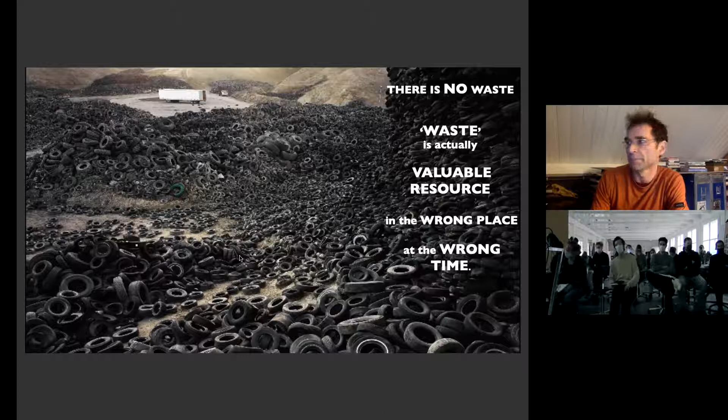Well, that's what I just referred to - there is no such thing as waste. Waste is actually resources that are for some reason not being used because they're in the wrong location or available at the wrong time, and then they get disposed of, which is a very unnatural way of dealing with materials. The construction industry is a very big part of that - we cause about 30% of all waste and 30% of all CO2 emissions, so there's a lot to win there. We say it's 40% - yeah, it might be even more, I know.

And this I find also an interesting thing, like we're constantly building and rebuilding our cities and the buildings. Quite often concrete buildings are torn down to replace them with sustainable buildings. And I don't really understand how you can think that that's sustainable.

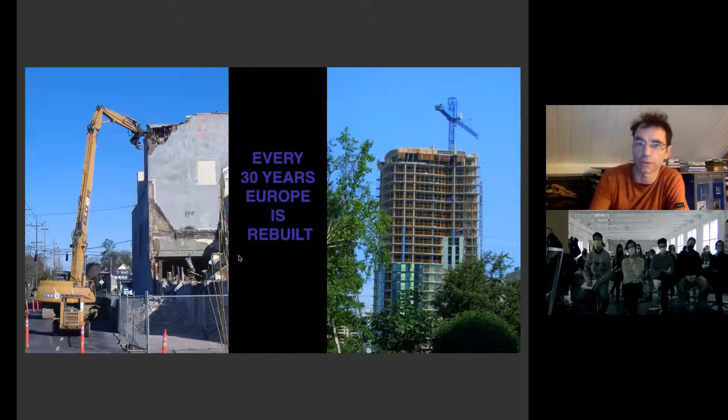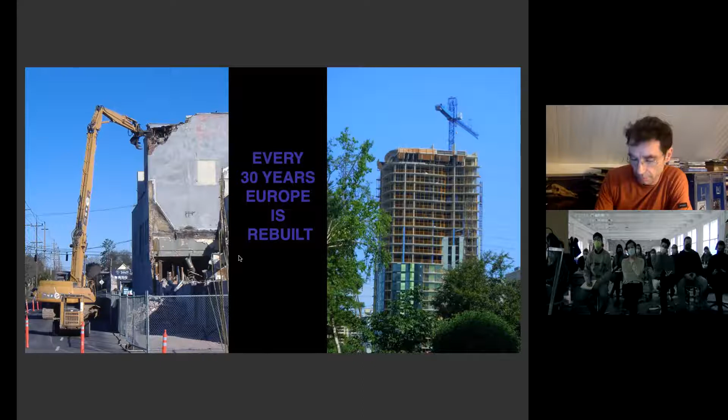I understood that the structure you're in was a temporary structure and will soon be demolished, which gave it quite a long lifetime, but I still don't really... I had a walk through it with Kevin this afternoon on his iPhone, and I think it's a very valuable district of the Zurich school. So it's a bit of a shame to tear it down. I think it needs structures like that in a school.

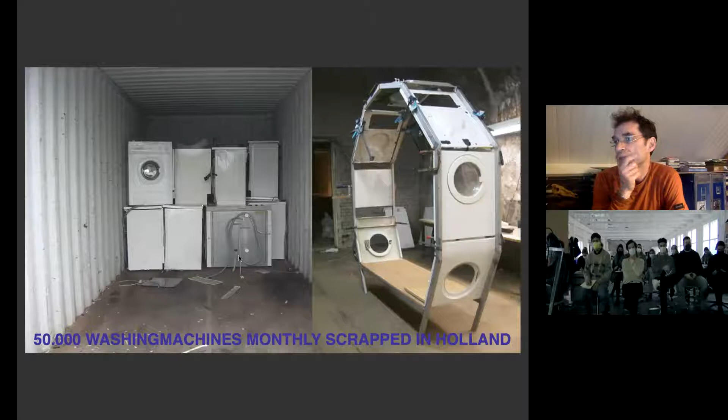Well, this is where we started. After we were studying, we came to the observation that a lot of waste was being recycled also. And we found one company in Rotterdam that was actually recycling 50,000 washing machines every month. And that's only the washing machines from Dutch households. And that seems so incredibly much, but that is actually true.

If you calculate the lifetime of a washing machine and the amount of people in Holland, then that is really what happens. And then it's a lot of energy to bring a quite interesting material down to basic resources again. So we thought we have to do something with that.

And we made this quite iconic object with it, which for us was not a piece of art, but for us was really a prototype for architecture. And we were also quite happy - well, not happy that it ended, but quite happy - that the University of Delft decided to buy it from us after it had been traveling Europe for 5 years. And it became an espresso bar.

Unfortunately, the whole building burned down one year after due to fire in a coffee machine - not ours, luckily.

But also in Dresden, there's a company in Germany that is scrapping airplanes. And from that we got - obviously the aluminium gets recycled and has quite a high value - but all the plastics that are in it are basically an environmental hazard and a problem if you want to recycle them, because they are very difficult to recycle.

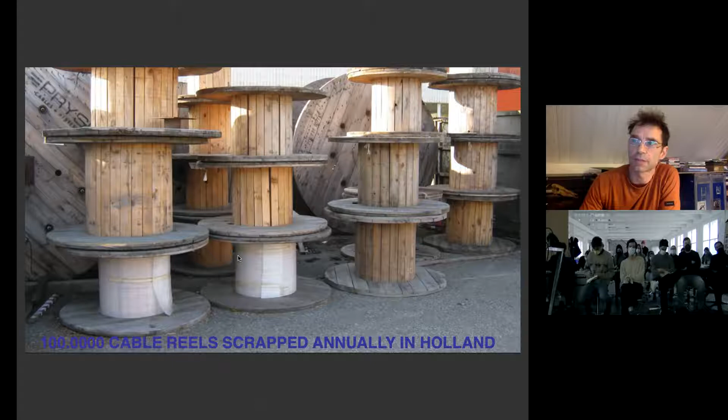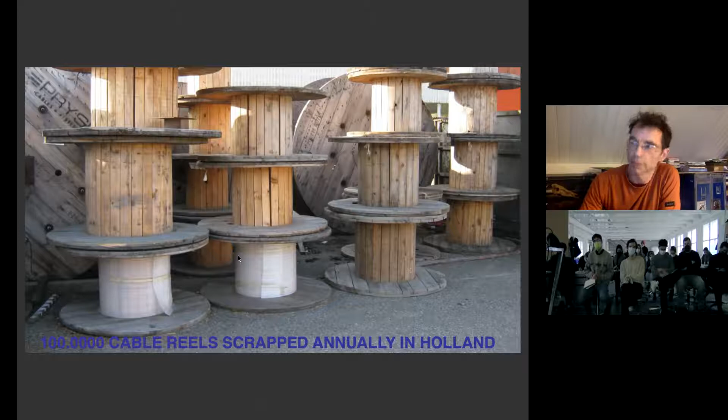But anyway, the cable reels - that's another resource that we've been using a lot. And I realized we have been using a lot of materials that are not part of the normal architectural language. The reason why we've been doing that, especially in the beginning of our practice, is that those materials are wasted in big quantities and are usually standardized materials. So these cable reels have standardized sizes.

With that you can make - well, this is just a first exercise we did - an art piece that we made to cross the river with, where we actually used the turning capacity of the cable reels. But then later we started using it in interiors. And the fact that it's a very standardized material starts to help make a kind of logical design from it, and also the curved forms of the materials - like I have a few samples here.

You see that it has this curved section, but that's used to make the benches with rounded, ergonomically rounded forms. That's what we always look for when we design with waste materials - figure out how to optimize the use of the qualities of the material. I've seen a few of the mock-ups, for instance the one with the stones that you've made. I think you really managed to discover the typical properties of those stones to create both aesthetics and really functional use of it.

I think that's really important in our work, that we always look for a way to functionally reuse the waste. Another thing, can you see my cursor? What you see here, for instance, this is a piece of metal that makes the table, which is also part of the cable reel. And these are the metal rods that keep the cable reel together. And even these things that are the feet of the tables are the rings that keep those metal rods in the cable reel. So we try to optimize using all the elements in a functional way.

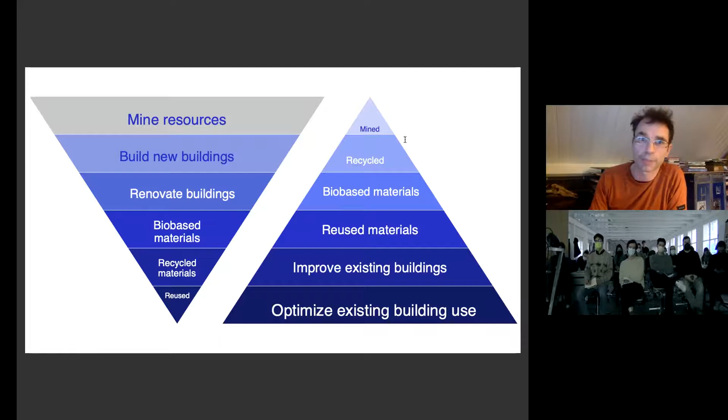And then if you looked at all those things, you add a layer of bio-based materials, recycled materials, and then you end up using much less mined materials. I don't say we have to stop completely with the mining, but if we can reduce it to like 10% of what we're doing now by taking all these other steps first, then we can have quite a big impact on the rest of the world in a positive sense - we can stop having war about resources because it's not needed anymore, because the cities start recycling, are in a circular system.

locate WORM in there. WORM is a multicultural organization that has offices, shops, a concert room, and a movie room. The concert room, movie room, and all the bars and so on is what we call the red WORM. The yellow one was all the shops, and the green one the offices and the facilities.

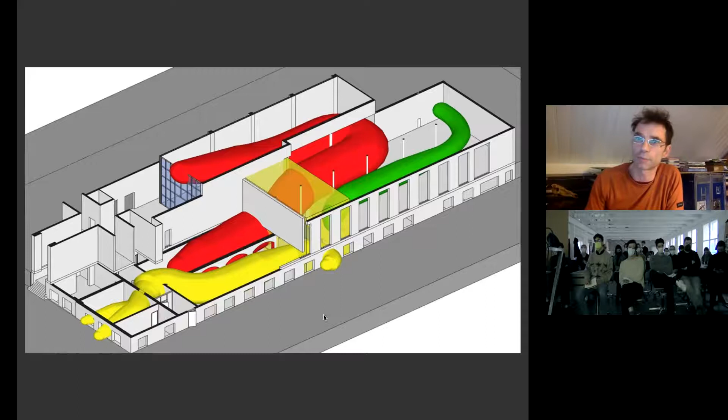We found out that if we want to locate them properly in the building, we had to make one strategic change in the structure, and then we could organize all those functions in the spaces that were already available without demolishing anything more. So we made one small incision by putting a gap in the facade, pushing the facade forward and creating an entrance and a staircase behind that entrance that connects the basement layer with the first layer, and that connects the offices, the concert room, and the shops.

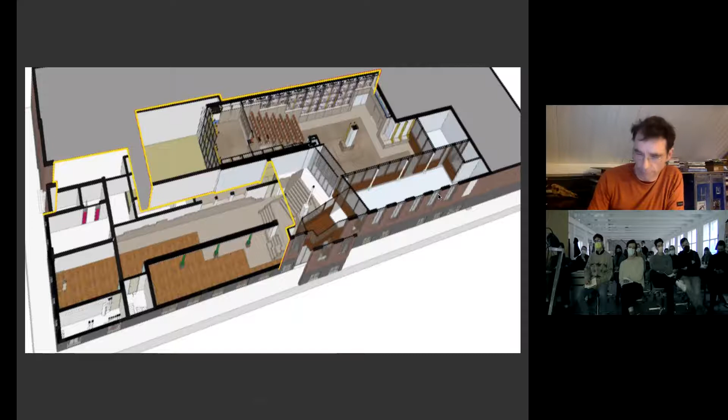By doing that, we could reuse all the spaces that were in there and change as little as possible. That was step one: transforming the existing building in a very precise way. It even went that far that there were dark rooms in the building from the former functionality, and since WORM has film studios, they could use those dark rooms literally exactly how they were. There were toilets and showers that we didn't have to build again.

Just by making that good investigation of the existing building and understanding where we would have to change something to optimize the use. The next layer is adding materials, and then not using any new materials. So we make a harvest map. The harvest map is two things for us. It's a tool that we use when we start a project to understand what kind of waste will be available when we build the project, so we can design with the waste that is actually available in Rotterdam, to build a project in Rotterdam. We don't have to transport waste, because we try to reduce the transport energy too.

And the other harvest map we have is an online platform where we've collected all the information about waste that is available in Holland. We've actually privatized that - it's now run by a different company. We are not running a harvest map anymore, and that's good, because they are spending their time on it. We still add things that we discover.

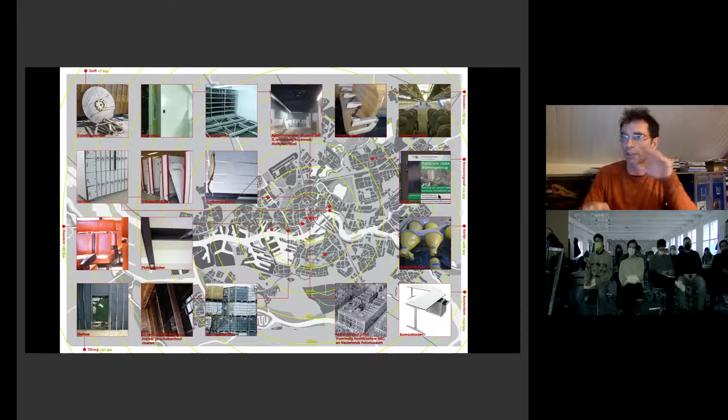By having this way of thinking and this tool, it also makes you design differently. You have to design from the materials that are available, and you don't first design something and then look if you can find the materials - you first look at what materials are available. You understand a bit the structure of the project: how much seating do you need, how much flooring do you need, how much insulation material. Based on that, roughly, you start looking for materials that can perform that.

So we knew that we needed about 2,000 square meters of very solid flooring for people to dance on, and thousands of people to walk on every weekend - hundreds of people, but over the years, thousands and thousands of people. So it has to be really hard and solid material. And flooring is quite expensive, so you also have a budget.

We found a company that was selling office furniture, and they had what you call dead stock - material that is actually new, but difficult to sell for several reasons. In this case, the reason was fashion. This office furniture was in a color gray that was popular in the 80s, and he somehow had 2,500 of these office desks in stock that he could never sell again. Other colors he could sell, but the gray one was impossible to sell because nobody wants it anymore.

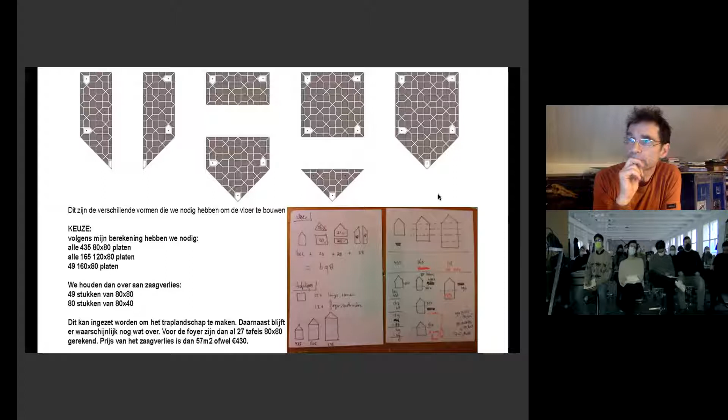So our challenge was to develop a pattern to lay these desks in. And the other interesting thing was that, of course, it is Trespa.

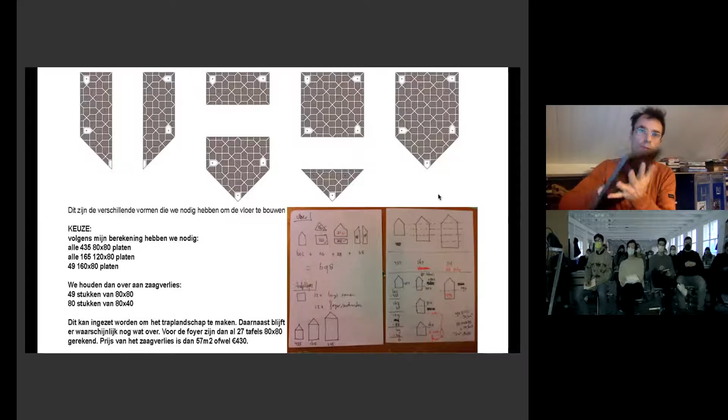I have a piece here. And it's completely this light gray color. It's a 9 millimeter thickness. It's a high pressure laminate, so it's a very hard pressed wood actually. And the top layer is also quite hard.

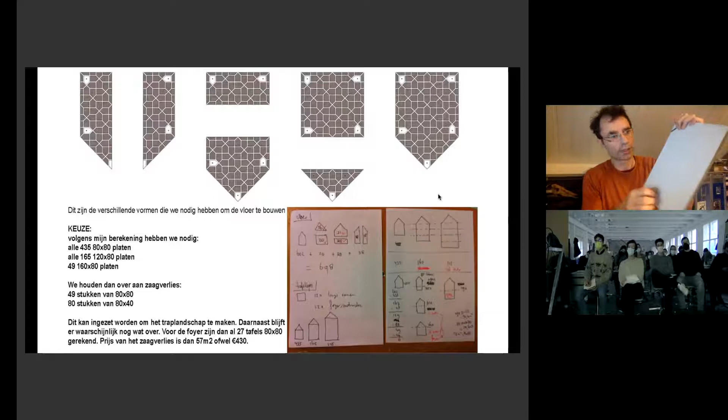But we found out it's very slippery, so if you spill some beer on it and start dancing, people will fall. So it's not good for a floor. The only good thing for the floor is that it doesn't wear. Basically, it never wears. So we decided to sandblast it. This is the gray top layer, and this is the sandblasted, very rough bit.

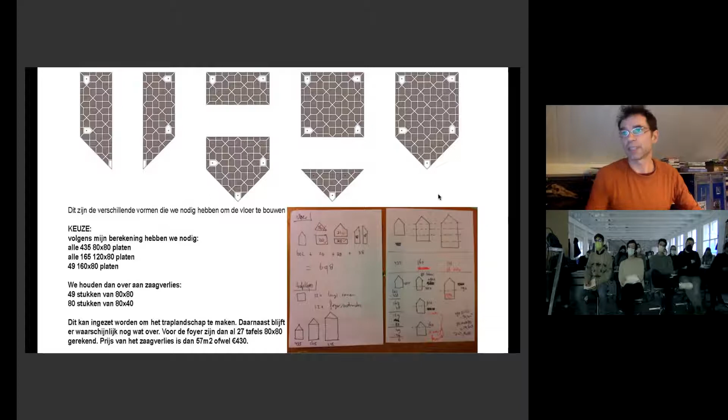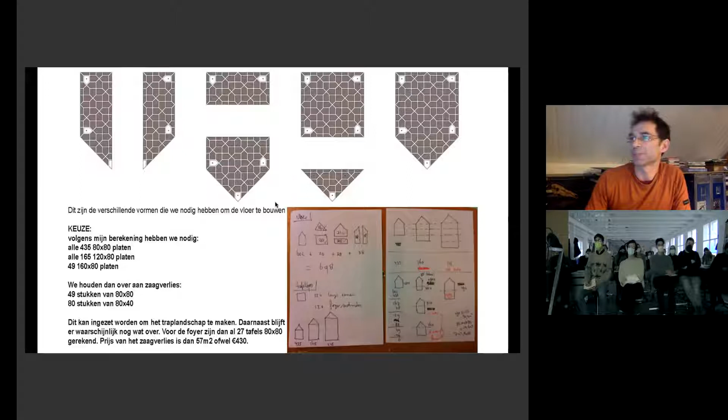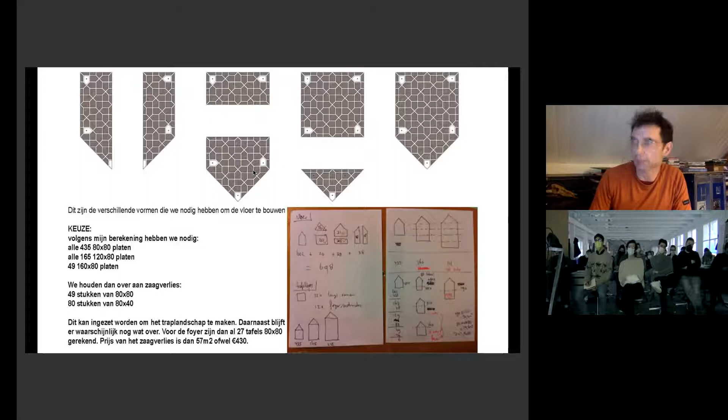The guy selling it told us, well, since you're going to use it as floor tiling, I suppose you're going to cut these difficult triangles off, so I'll give you a discount for the square meters of the triangle. And that made me think, okay, can we make a laying pattern in which the pattern that is sandblasted on it also represents the pattern in which the floor is laid? And that becomes a decorative element, even though it is designed from a functional perspective.

We got really enthusiastic about the material, so we also started using it for the plinth, the lambrisering, the first 1 meter of the wall. And in this is hidden the ventilation system.

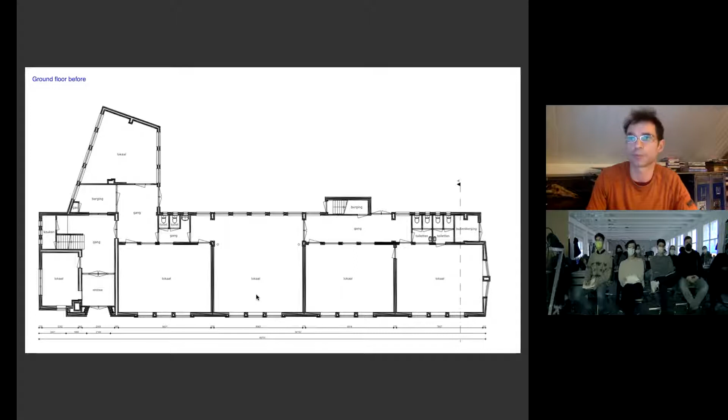So they asked, and also it was due to regulations, it was very difficult to put a public space in the building. Because of fire regulations and fire brigade requirements, we would have had to change so much about the building to integrate it, that we decided to build a pavilion outside the building on the former school square.

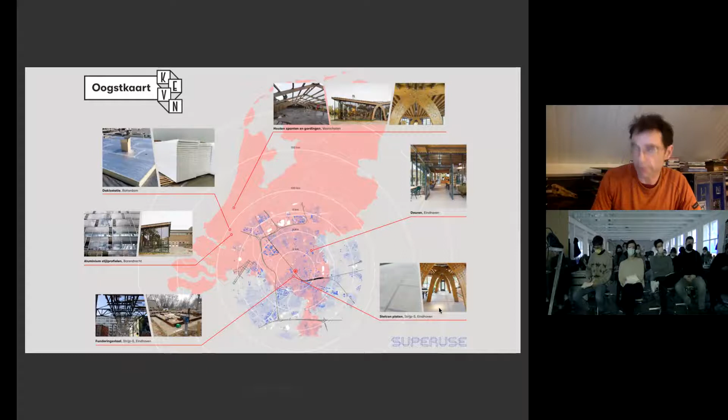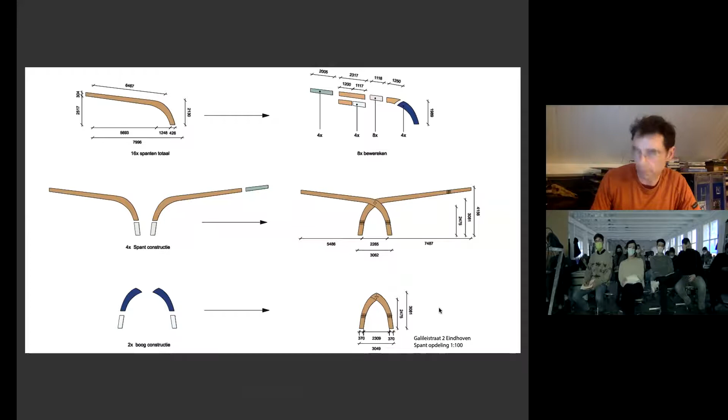That's where that was made. And then we made a harvest map, and we found that a lot of the heavy materials were actually just across the road, while the lighter materials came from other places in the Netherlands. We found these wooden structures that, by chopping a few of them into pieces, we could redesign into the main structure.

Another aspect of this building is that it's demountable. So all the bolts - we didn't glue anything. Everything was mounted and dry fabricated, so the whole pavilion can be taken apart and transported somewhere else if for some reason it's not wanted on that spot anymore.

You can see also in the floor we used concrete slabs, and you can see the lines between them. They are just stacked. The foundation is stacked. That's what you see here.

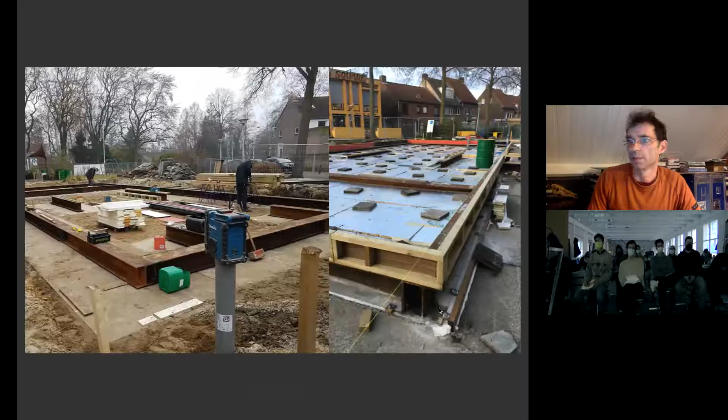So we used standard concrete elements, and the metal came from a demolition on the other side of the road, and then insulation, and stacked it all up until you got a floor, on which the main structure was then built.

Then another material that we worked a lot with is another composite material. So this is the wings from the wind industry.

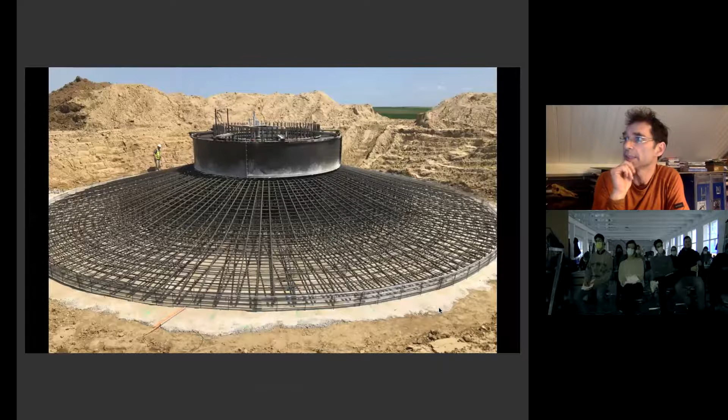What I find interesting is, we've been working with wind blades now for 15 years, and I've just been to a wind conference to understand if we can work together with them, because they have really a huge waste problem. But the more I start to know about this renewable energy form, the more I get scared, because the impact it has is incredible.

This is the foundation. You see the little men, huh? And this is a land-based windmill, so it can't even be that big. The ones they build in the sea now have 90-meter blades. If you understand that the 55-meter blade, the biggest one we've ever worked with, is 17,000 kilograms of composite material, it's impossible to recycle.

They're handmade - that's interesting too. People are making these things by hand in a mold. There's a lot of labor going in, a lot of transport, a lot of materials. Transport is really expensive and requires a lot of changes - they even have to take lampposts away on crossings they want to cross, etc.

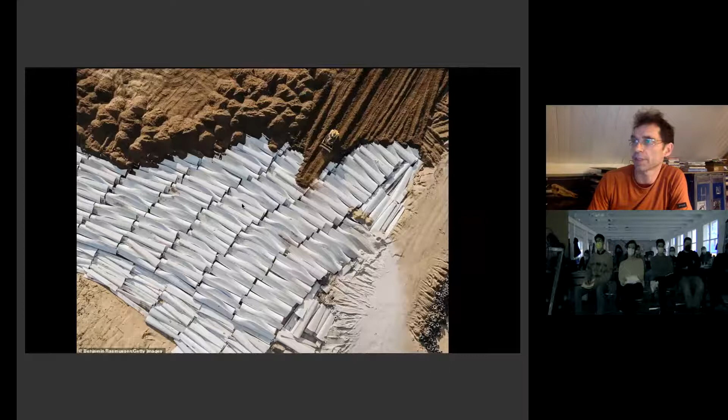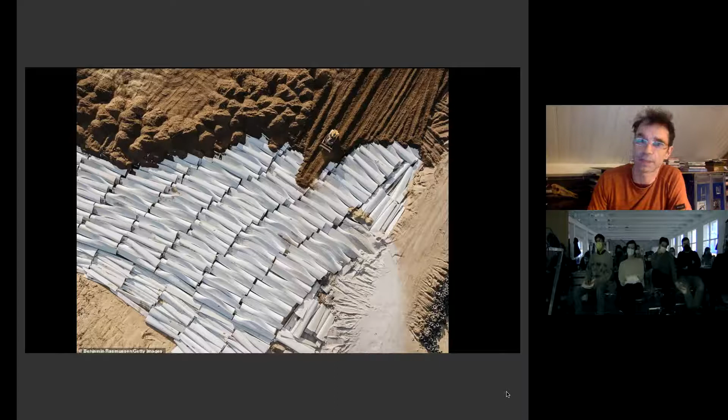And then we throw it away. That's the whole thing I don't understand. Even if I saw presentations at that wind conference showing the CO2 emissions are less than if you use fossil fuels for the same amount of kilowatt hours, I still think we cannot afford to waste resources in this kind of way. The planet is getting to an end of being able to deal with that. So I don't believe we're going to solve the climate crisis by installing megawatts of energy production at sea like this. I think we need a completely different approach, but I'll come to that later.

First, what we do with the waste. So that's still, okay, we try to extend the lifetime of the waste, and now finally the wind energy sector, after 15 years of trying to get to them, is asking us to come to conferences and show what we can do with it.

In the playground we changed more because there were also bigger blades - these are like 35 meters, 3,500 kilograms of polyurethane foam, epoxy resin and glass fiber, of which 2,000 kilos is glass fiber and 1,500 kilograms is all kinds of plastics and fossil fuel based materials.

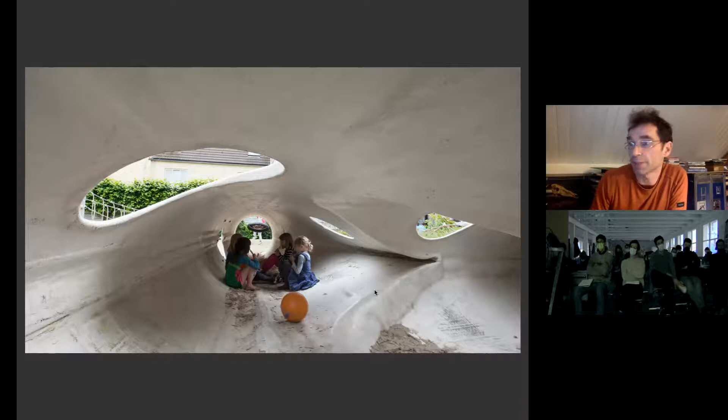And these kind of spaces - what I think is really nice about reusing this kind of waste is that it comes with so many assets. It has so many beautiful things, beautiful spaces. You could spend hours and days modeling this kind of 3D form, and we don't have to model them - they're part of the waste. And then you get a project that has much less impact, because not only do we save the waste from being wasted, we also don't need virgin resources to build a playground.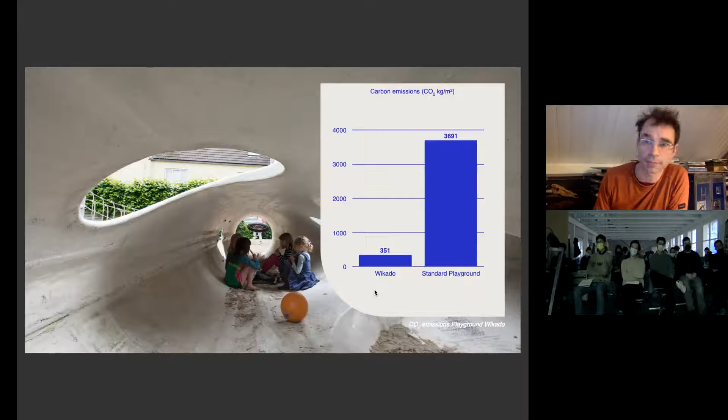So it makes quite a big difference in the impact on the planet, and it can last forever. These playgrounds - this one has been there for 15 years now and has only been painted twice in the meantime. That's the only maintenance it needs - it has to be painted.

So as I said before, we are now several studios. This is the team of the studio in Rotterdam. Jan is the other founder - together with Jan, we founded the company in 1997. This is the Chinese team. Gillian worked with us in Rotterdam for a few years and then moved back to China.

In the first two years after they started their Superuse studio, Jan traveled to China a few times, and we thought we don't want to fly too much, so we basically educated the team in China to work with the waste there, which is crazy - the amounts are staggering. They found one company that produces window frames with double glazing for the European market, and they always produce 10% extra to make sure they have enough, and that gets thrown away. That 10% is enough to start a building firm and build skyscrapers in China with it. You can't imagine how much that is.

And this is my studio - we're called Superuse on-site. I've shifted the focus a little bit towards community living and building architecture that is not only made from waste and bio-based materials, but also improves the energy performance of the building. Even though this whole workshop has been about waste reuse, I think it's a very important thing to think about.

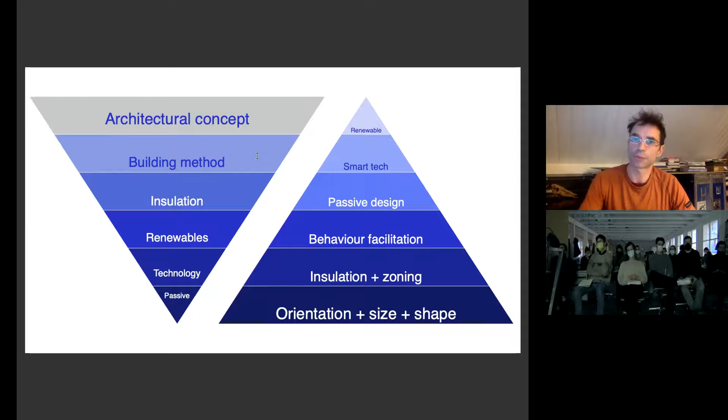This is again, this kind of thing where I started to see that everything we do as humanity is upside down, basically. I showed you before how we deal with resources. I think the same applies to how we deal with energy.

Applied to architecture, most architects design a building from some kind of concept based on more or less aesthetic things, sometimes based a bit on flows of people through the building, or functionality quite often. But when we first started working with waste, a lot of architects told us, yeah, but I don't want to work with waste because then I'm not free to design whatever I want anymore. It's like, huh? Okay. And if you want to take into account the climatization of your building, also you're not free anymore. So people try to still make the same kind of architecture that we've been making for the last 100 years.

And then you just add a lot of technology to make it sustainable. We think we should turn it the other way around.

You should basically think about the building based on climatic ideas: how is it oriented, where is the sun, what's the size, can it be smaller, what's the shape, is it a really complicated shape that loses a lot of energy naturally, or can you make it more compact? Can you insulate it properly? Can you put the program in it in such a way that it needs less heating by zoning it properly? Can you also make the architecture in such a way that sustainable behavior is easier than anything that is wasteful, like closing your curtains properly, or whatever behavior is needed?

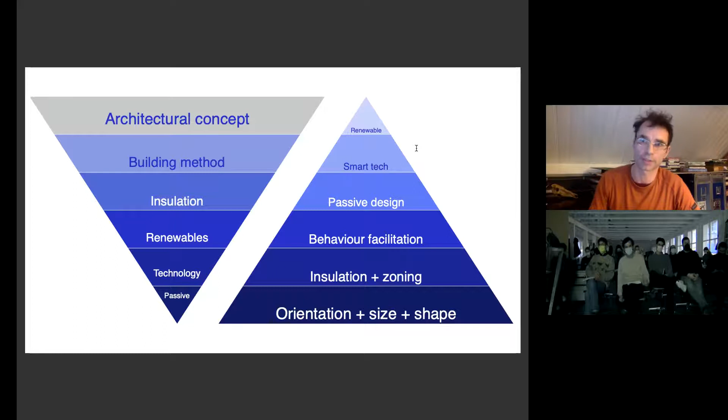Then passive design, and then you need a very little bit of technology to make it work. You only need a little bit of solar panels instead of a lot, and that's a bit related to this archetypical windmill from the Dutch history.

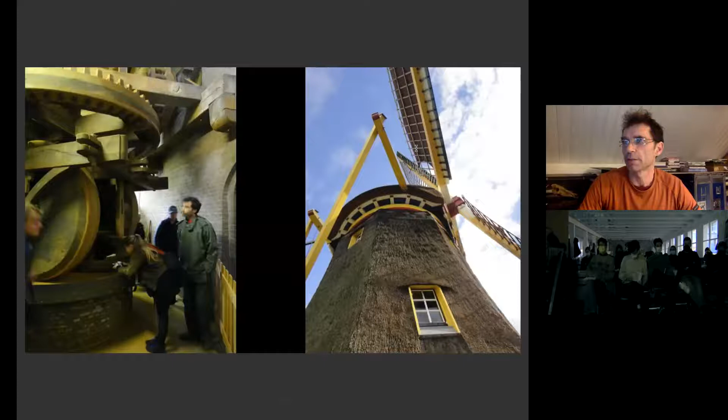What is the situation with these things? They were built in such a way that they could be moved. So they are industrial, flexible, demountable buildings already. They were made in a way that they could be taken apart and moved. They were made with materials, insulated with straw that was grown around them.

The windmill family was living in it. It was also a house, and it was a production facility. It ground the wheat to make the bread that was used in the village next door. There's a whole circular lifestyle going around.

We did a calculation of how efficient these things are, and even with the wooden machinery in them, they are more efficient than - let's put it this way - if you harvest the energy from the wind on a square meter of surface of the wings, the loss of energy towards making a kilogram of ground-up flour to bake bread with, it's more efficient to do it this way than sourcing it on the sea, transporting it through copper cables to the land, then into a factory where it's transformed into a different voltage again, and then they grind the wheat with it and bring it to the shop. That whole system is much more inefficient than the old-fashioned system, and that is due to the lifestyle, due to the directness, and due to the much less resources needed to do this whole process.

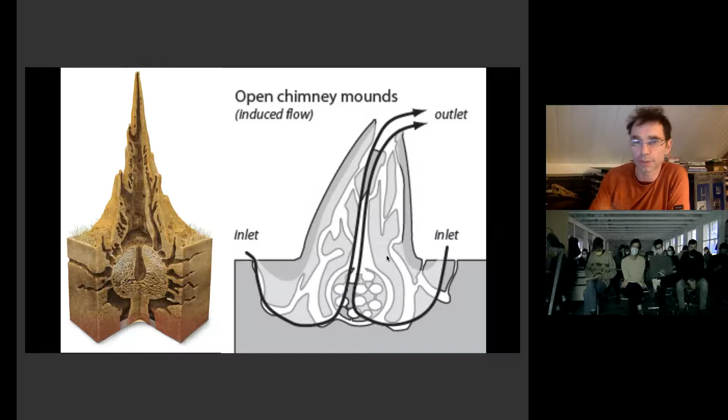So I think overpopulation isn't even the problem, it's our lifestyle. I think it would be wise to slow down in getting more humans, because it's a really dumb idea to assume we have to be 10 billion in a few years from now. But it's the combination of overpopulation and our lifestyle which creates the problem.

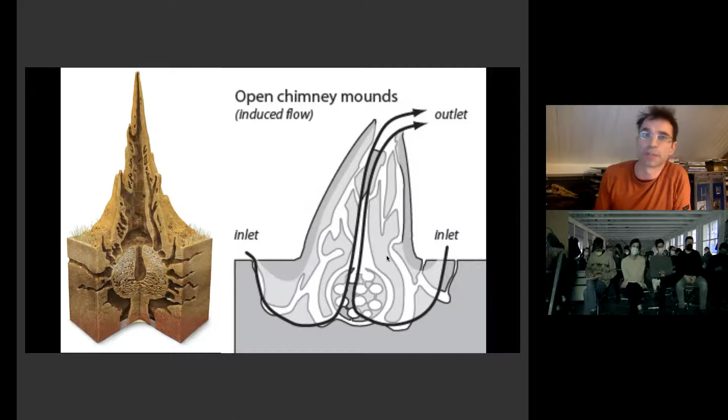So we can work also on our lifestyle. And that's where this other kind of approach we're having now to architecture comes in—can we make houses? This is a prototype for us. We call it the greenhouse. Here we tried to do the best we could to use barely any virgin resources and barely any energy to heat the house.

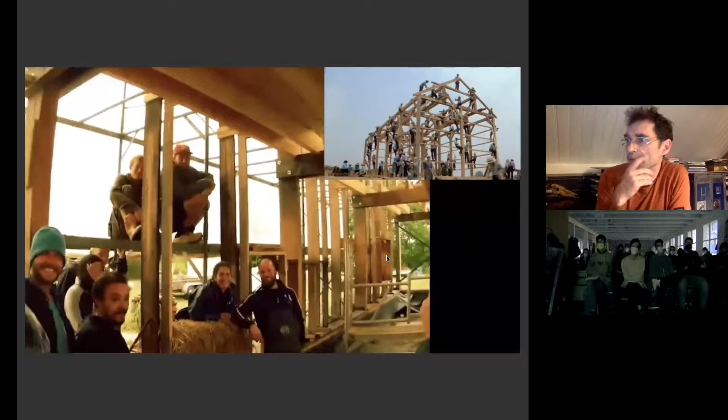So one thing we did is build it with the community that lives in it, a bit like the barn raising that the American Amish do. We made a simple wooden skeleton design that could be made by people who aren't skilled workers, so they could invite a lot of friends and volunteers to help build it.

But to have all these volunteers and friends working on their plot for nearly two years, they needed facilities. So they had a lot of land—that was the good thing about this place. They started, they were already growing food, but to feed all their volunteers they needed a bigger garden, so they made the garden bigger and started producing more food.

They started a bakery. They started a mushroom growing facility where they grow mushrooms on ground coffee. And they made several tiny houses on the plot, which after the project were still beneficial because they'd learned to bake bread, learned to make enough food, and now on Saturdays there's a small shop for people who live around them to buy bread and biological food.

And they rent out the tiny houses now. So by building this house, they've created not only a house but a small local economy, producing food locally and having a relationship with the environment around them—making the whole place more sustainable by being more able, like the ants, producing your own food, producing your own energy.

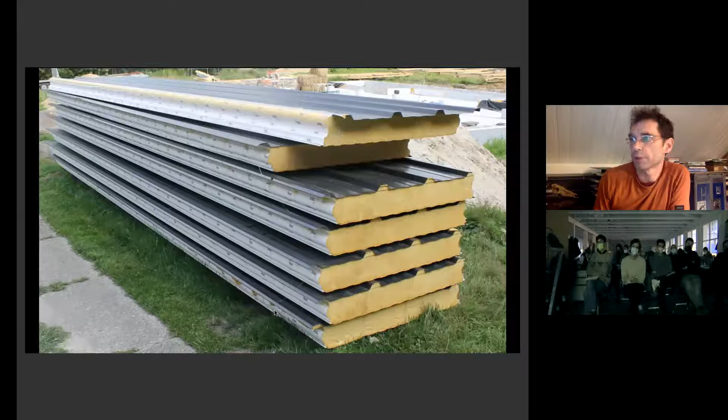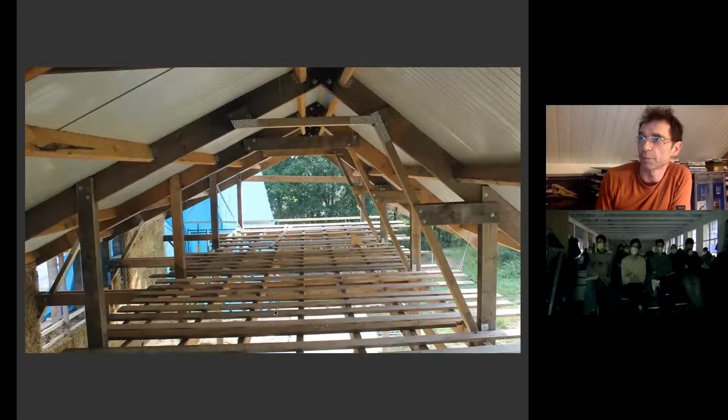And this is B-choice, or second-hand insulation—not biological at all, kind of what we shouldn't make anymore. But since it's still being made and there's a lot of waste of it, we used it for the roof. Also in the building process, we put the roof on before filling in the skeleton, so we had a covered building site.

And the glass house was also put on before we filled in the lower levels. It was interesting because the constructor told us you can have people standing in a glass house picking tomatoes, but you can't have people living in it, because the rules for housing are different than the rules for glass houses—even though in both cases there are humans under it. The danger is the same, I think, but still we had to use a different, layered glazing in the roof.

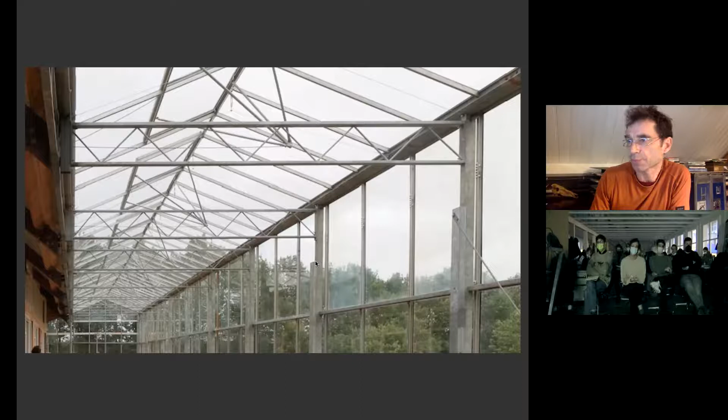We also had to double the columns. That column here is actually the one we cut away on this side—we cut one column from the glass house and added it to this one, and that way we could use it for the house. It fitted the regulation; it was quite simple.

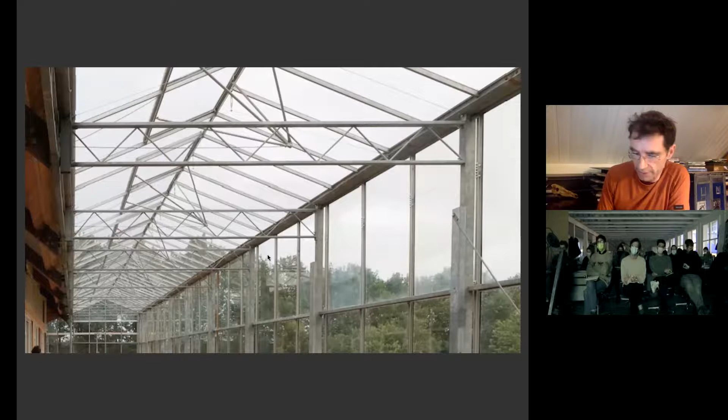But the interesting thing in working as an architect is that the constructor first says, you can't make people live in a glass house, that's not possible. But then you talk with him like, okay, how can we make it possible? It's really a lot about involving everyone in your design decisions early on.

That's really an important decision to make. If you want to source the heat from the sun, the north side is where you lose heat, basically always. So you want to minimize the amount of windows in the north facade, and use only small windows.

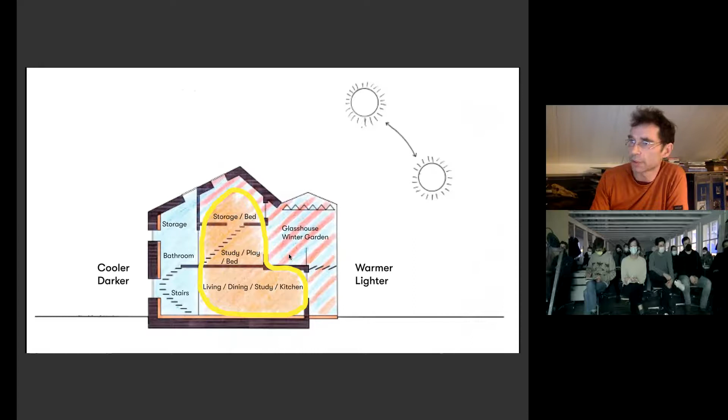This is also the zoning bit from the pyramid that I showed you. By zoning, you mean also that on the north side you put storage, bathroom, stairs. Bathroom you use 1 hour a day, so you can just warm it up for that 1 hour a day. Then in the core you have all the functions that need more warmth and a more comfortable climate, so you reduce incredibly the amount of cubic meters that you have to actually warm. And you place them next to the glass house that gets the sun in winter.

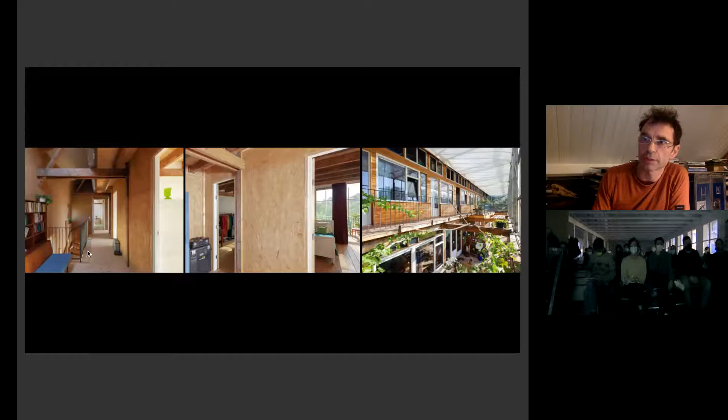Here you see the 3 layers in pictures. That's the north side: hallways, storage, vertical staircase, which also helps in the ventilation, the rooms, and the Serre glass house on the south side.

In winter, with the low sun, a lot of the sun comes in and heats all the thermal mass. We have a lot of mass in the floor, and especially in the first sections of the walls here, that gets warmed by the sun, and that keeps the warmth in the house for several hours afterwards. But also you can work with the ventilation, like the warm air that warms up and ventilates those rooms, and then you keep this side closed.

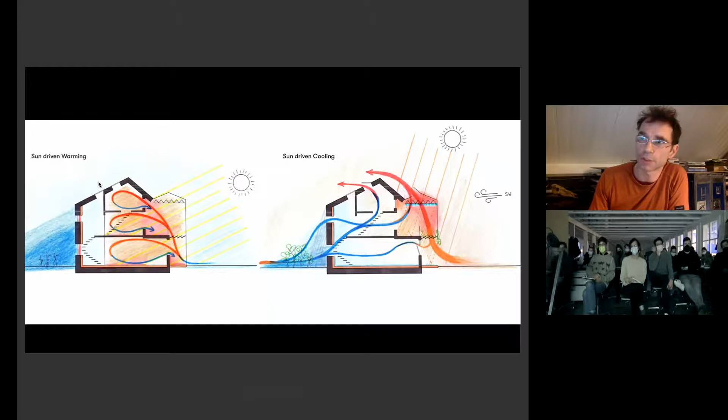In the summer you do the opposite. Basically you let the warm air create a draft up, because when the sun shines it gets incredibly hot, like 40 degrees in the glass house. So you use that to create an updraft, and that updraft is strong enough to pull air from the north side through the house. On this side, we measured 21 degrees on a day that it's 30 degrees, and in the glass house it gets 40 degrees. Like that, we actually cool the whole house down to 21 degrees, which when it's 30 degrees in the sun, feels really cool.

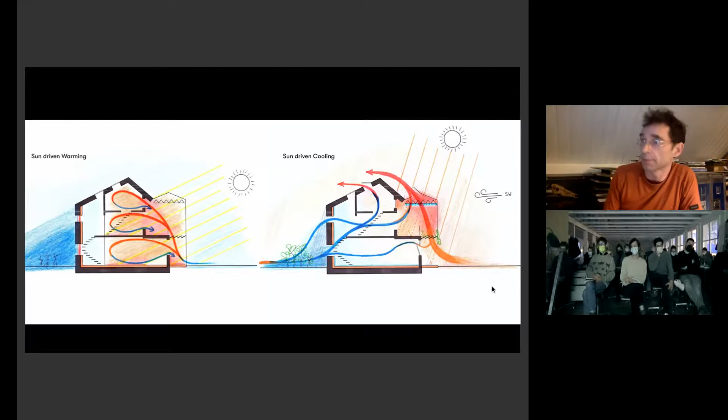What is left is a little bit of technology: 16 solar panels that do all the electricity in this house for the 4 families that live in it. It also supplies more electricity to another house that's 50 meters further.

These tubes are for showering and the warm water. And then we have 1 or 2 mass heaters in it that use wood grown on the plot where they live. Normally in Holland you would have this kachel on for about 4 or 5 months over winter, but in this situation we're down to 6 weeks, 2.5 months, depending a bit on how cold the winter is.

The rest of the time, the house is comfortable by using the possibilities of letting the sun in, closing the curtains, and harvesting the heat from the sun. And behavior: the people that live in it also understand that they have to wear warmer clothing when it gets winter, and accept that the house can go down to 17 degrees. But if you dress properly, like we do in our house too, with woolen underwear, the house is like 16, 17 degrees when it gets really cold outside. We accept those fluctuations.

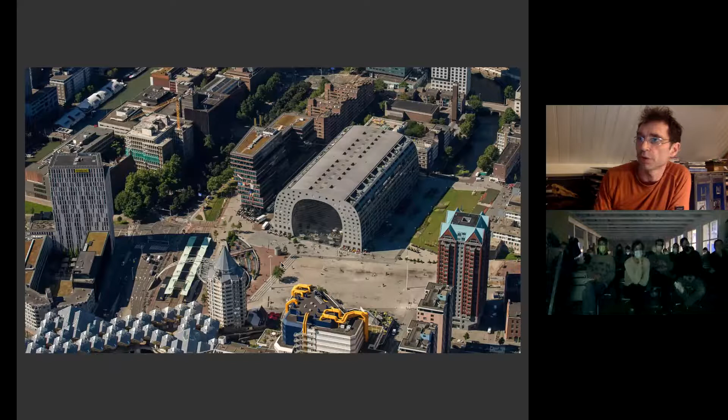And then if you look at the city thinking about that, this is Rotterdam, obviously, I cannot look at this without thinking, okay, this is kind of a mountain. Why isn't anything growing on top here? Why in this valley here, it's just grass? Why can't this be productive? Why can't these trees all be fruit trees? This is just a collection of valleys and mountains and a landscape to grow food in.

And if you start doing that, you get a completely different city. You don't have any fine dust problems anymore. You don't have water overflow problems anymore.

You can climatize your buildings properly because, like in the house that I showed you, there is a lot growing on the north side. We've planted trees and bushes there to create an even more cold climate, because if it's full of plants, you get natural evaporation in summer, and that reduces the temperature, which is a natural way of making an evaporative cooler — basically an air conditioner, but without using any electricity, just using nature — and then you can grow some food in it too.

So that's kind of the principles that we're now trying to apply on the next project that we're working on at the moment. This is being built at this moment.

This is a one-floor community building that was built in the 60s. It has a patio with a tree. This place is a marriage hall and a garden, and it had been used as a community center, built with a library, marriage hall, all kinds of public facilities.

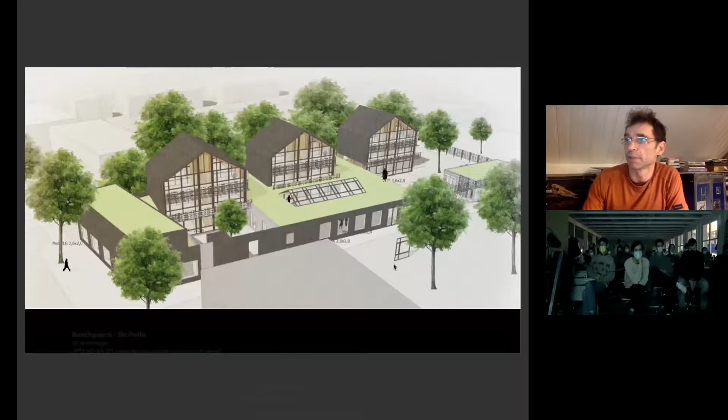But to make 23 houses, we had to put in 3 houses with each 6 apartments, and here another 5. This is based on the carrying capacity of the existing foundations. We could put 1 floor on this bit, which was quite interesting because it's narrower here and wider here. The construction was made in such a way that there's the same amount of foundation poles in this area as in this one, but since this is less meters, we have more carrying capacity in this part.

So we could actually top up one layer of housing on this one, and we had to make new foundations for all three houses. So we put one in the patio, one in the marriage hall, and one in the garden. And to compensate for the loss of garden that we had, we decided to make all the roofs into gardens, roof gardens, that are accessible from the houses.

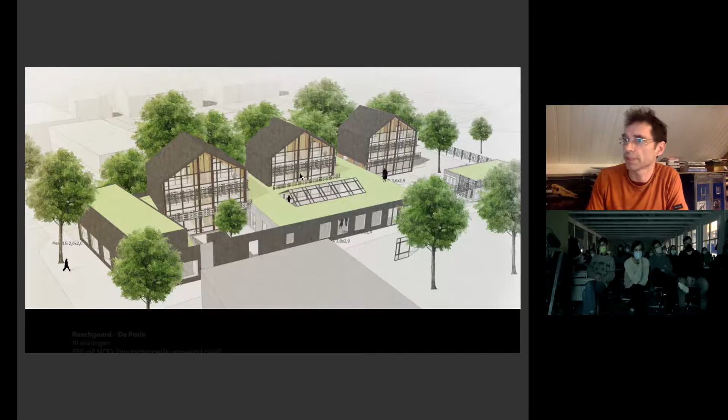So if you live here, you can go onto your roof garden and have your salads and everything growing. Also, even though these first two are community houses, I can show that here. We have a social community of about 40 people, of which about 10 to 15 live in this house, 10 to 15 in this house, and 10 to 15 in the house in the garden. Those two have a communal kitchen in this area, so that's 15 people using one kitchen on the ground floor.

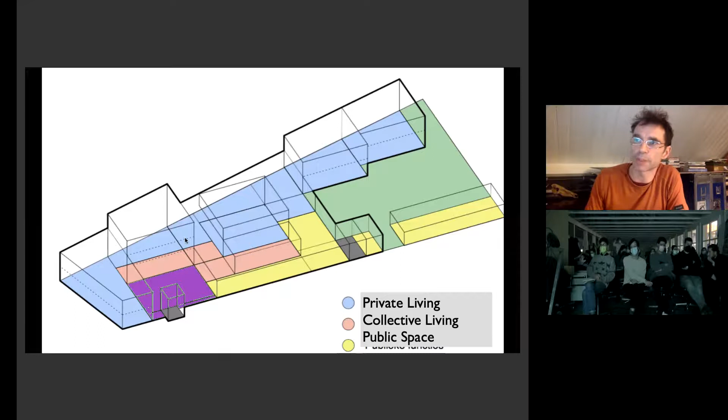And the one in the garden is 6 individual apartments. Like that, we create a lot of diversity in housing size. Also by having a lot of common space, we could reduce the size of the houses. So that's the first layer where you think, okay, if you have a smaller house, you use less energy. So all these people have quite small apartments, going from 25 square meters to 75 square meters maximum for a whole family with children.

And a lot of the original common spaces of the original building will become common spaces for the neighborhood again. This part will become a restaurant or a food place shared between the whole group and the neighborhood. This is where they're processing the food, and this will become a workspace now.

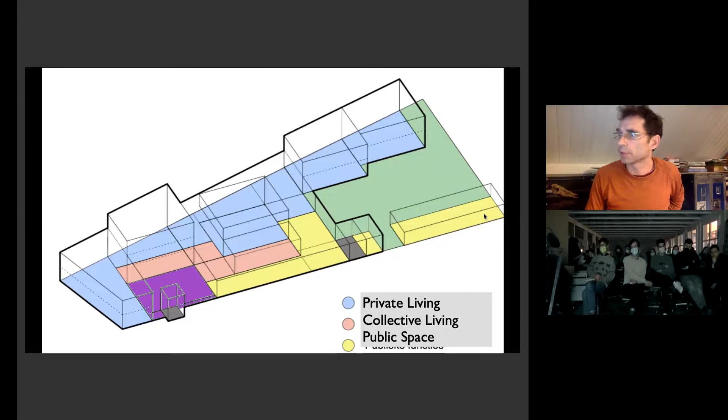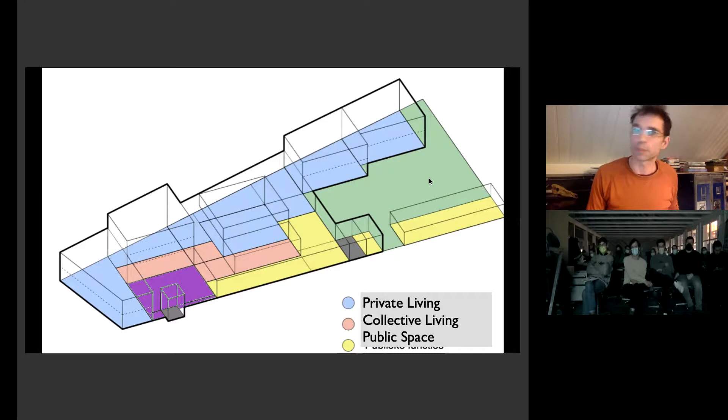At this moment, we are processing the waste material so the contractor can work with it. When the building is finished, it will become a social workspace where people from the neighborhood can come to repair their bikes, repair furniture. Also in this whole idea, if we change our lifestyle, we have to facilitate lifestyle change. So what is needed? If we want to stop importing materials from China, we should be able to repair stuff in our cities. So that's what this space will become, a repair shop that facilitates that for the whole neighborhood.

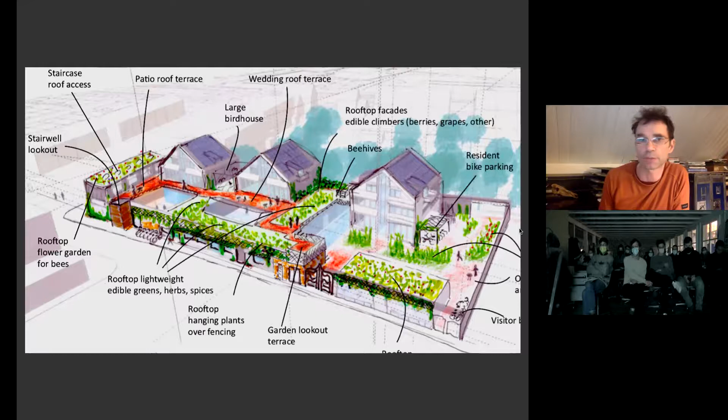But then you get a bit of an ecosystem of all kinds of ways of sharing, all kinds of ways of growing food, naturally ventilated, needing much less equipment to actually climatize the building. And it's built 100% with waste and bio-based materials.

That's a bit our mission at the moment. And since a week ago, we received a prize, which is quite an important prize in Holland, annually given usually to an architect who is like 75 years old, has done a lot of work, and had a big company building all kinds of big buildings. This year they decided to give it to us, because they said we have put circular design on the agenda in the last 25 years with our work. And we've actually convinced a lot of other architects to work like that too.

And now we are, what we say, at the start of a change. Building with waste is just one aspect of building sustainable. The things I showed in the last two projects, I think, are just as important, if not more important: that we actually make our cities better and make our existing building stock better by improving their energy use, and also improving the communities in our cities, so people can start sharing stuff again, help each other repairing the stuff they need, and cities can actually become ecosystems like the ants and the termites.

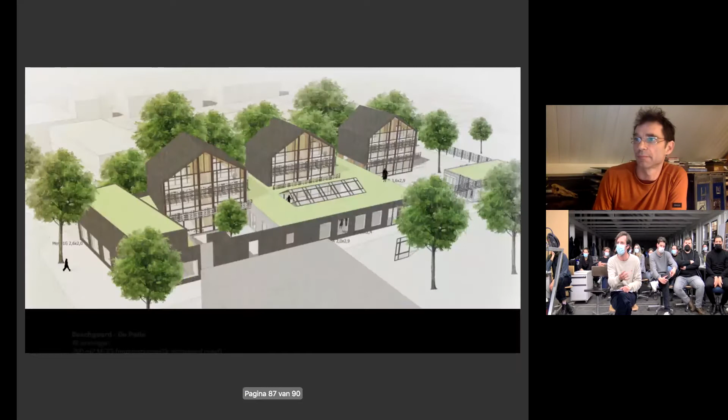This is just a small question, but going back to the windmills, I was really surprised, because windmills seem like a relatively young thing, and it's surprising to see that so much is already being discarded.

Do you know why those blades are thrown away, and why they can't be used anymore as windmills?

There's several reasons. Some of them are, in my opinion, legitimate, and some of them are just perverted economics. I know a lot about this, so I can tell you a long story, but I'll try to keep it short.

The first thing we know is that they get discarded after 15 to 25 years for technical reasons. They are made with glass fiber, and they turn around sometimes near the speed of sound, the big ones. So there's a lot of physical tension on them.

So if small cracks start appearing in the structure, they have to be discarded because it's way too dangerous. They can't break, they're not allowed to break up there. So they are checked, and if small cracks are found, they have to be discarded.

But that's a small part of it. The other part is that they actually don't have a longer technical lifespan than 25 years, like a lot of things that we make. And I think that's a system failure in our way of working.

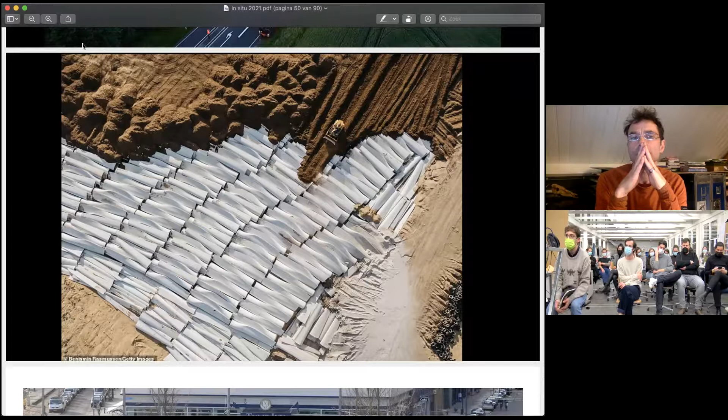I have a question about your harvest map. You talked about them as if you had them quite quickly after the commission. We know them, we use that tool, but most of the time rather late in the process, because to get the materials, we need a lot of time, and sometimes it's 2 years before we use the materials that we find the pieces. Can you maybe say 2 words about the way you find the materials for your commission? I get the question.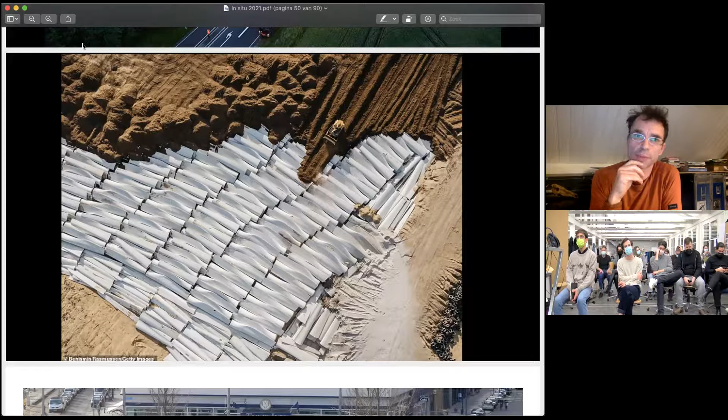Yeah, that's why we make a specific harvest map for every project we do, where we map out what kind of materials would be available at the time we're going to realize the project. And every waste stream has its own logic. Demolishment is indeed quite a difficult one, because demolishers usually get their job, they get like 6 weeks or something to sign up. And then when they get chosen, within 2 weeks, the building has to be down.

That's a very fast system. That's one of the reasons why, especially in the beginning, we focused on materials that were outside architecture, like windmills, like parts from airplanes, because they come from production processes and they are identical materials, and you can count on them. You can design with them regardless, because there's this company that does a certain project and also has a certain waste, and it has that waste every month. So you can actually plan on it.

Another interesting one, I think, is things like exhibitions. Exhibitions are planned, designed, built, and you know exactly when it stops. So you already know exactly what material went in, and you know exactly when it will become available. So if you work with exhibition designers or exhibition places, you can plan on the waste coming available like a year before it becomes available, usually like half a year before.

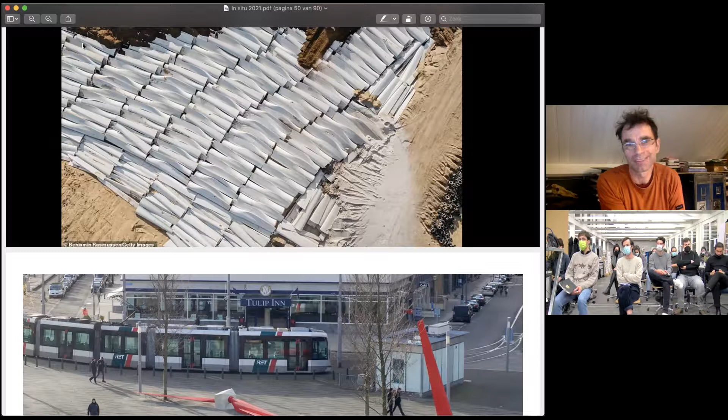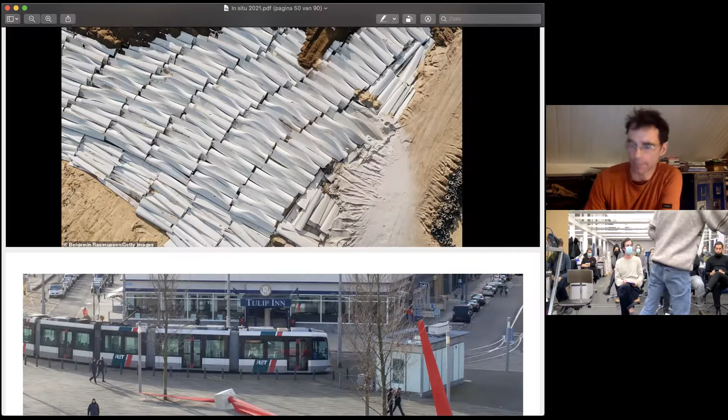I have a question. I'm a bit depressed. Do you hear her? Not good enough, no? Maybe take that. You hear me now? Yeah, very good.

Yeah, I'm depressed today because I talked to some politicians this morning and they were fighting about zero CO2 by 2030, 2040, 2050, and they didn't want to come down from 2040. So today I don't feel that we will make it. Do you think our work has an influence at all, what we are doing?

Yeah, I think it has a big influence. I don't think we can wait for politicians. Yeah, that I fully agree. But if they don't follow and if they don't facilitate our work, for example, we made this big pilot project and another small one and another small one, but it doesn't make an impact. I'm teaching here now and I'm very happy about all these students who have similar ideas, but still today I'm really frustrated. Maybe you can help make my mood a bit better.

Yeah, what helps me, I mean, I obviously have the same problem. Going to a climate conference doesn't make me happier. Oh, yes.

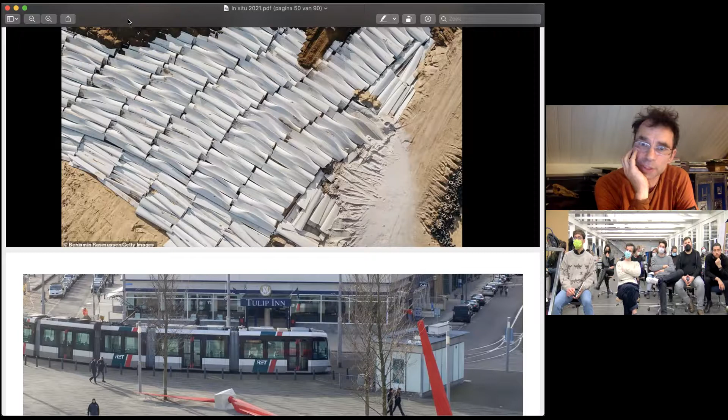On the other side, the other scenario, it might be possible to change. And then again, the only thing you can do is prepare for this different lifestyle, because also in a collapse of society, the best thing you can have is an autonomous community that can produce its own food, produce its own energy, recycle its own water, and is able to improvise and build architecture from the waste that's all omnipresent. So I don't see any reason to stop doing it, because it's the way to survive the collapse, it's the way to prevent the collapse, and it's the way that is needed after a potential collapse. So in any kind of scenario, it's the only way to go.

Okay, so let's survive. That's the best option. Thank you. Yeah, it comes down to that all the time.

We started producing food in our garden, on our roof, doing it ourselves, and that's the thing that makes me most happy. We're sharing it with neighbors, and we're building community in the place that we live in. And then professionally, we're also involved in creating communities and building from waste and making ecological systems.

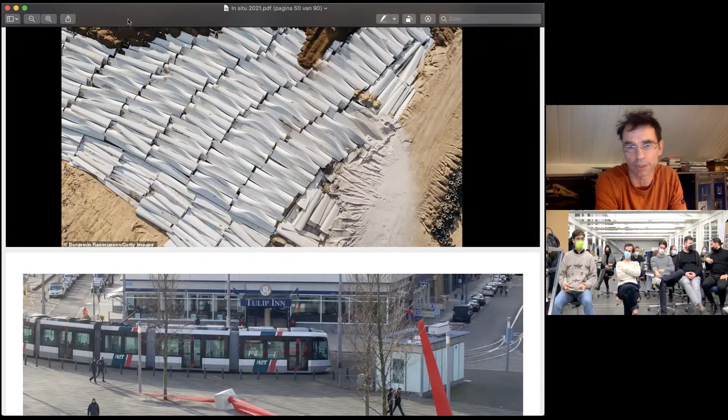Maybe, the optimistic thing is we can actually change. We actually have an impact on changing society. We did get that prize, which is really an important prize in Holland, because we are recognized for having a big impact on the architectural community there. Not because we build such big buildings, but because we are changing the way of thinking, changing the way of acting of a lot of other architects.

Okay, so hope dies last, isn't it? Yeah.

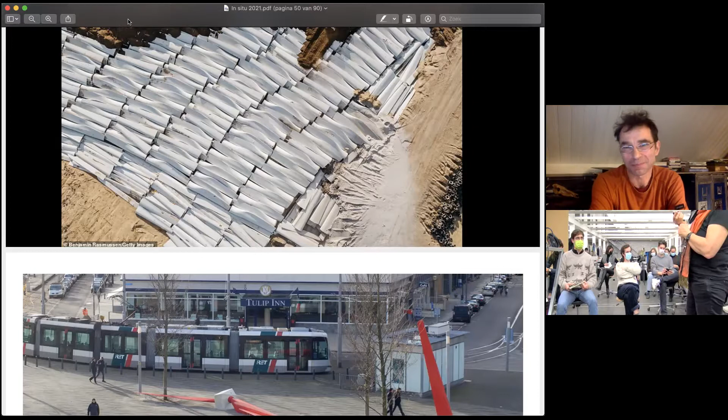Any other question? They say it's a good end. Oh. No, Okay, sorry. the- That would be the end, but okay. Okay. Do you make the end? No. Yeah, but thank you very much, Césare.

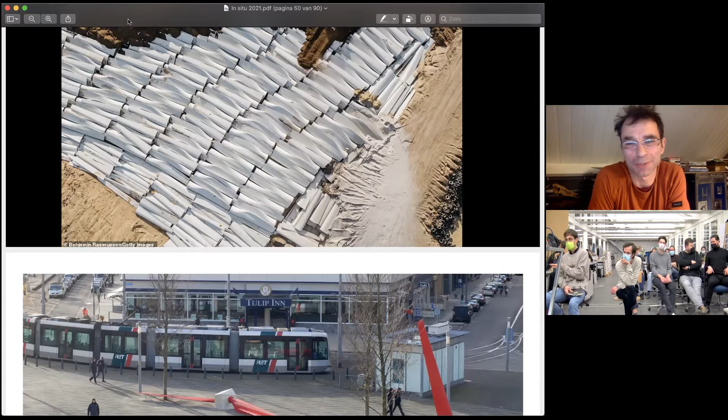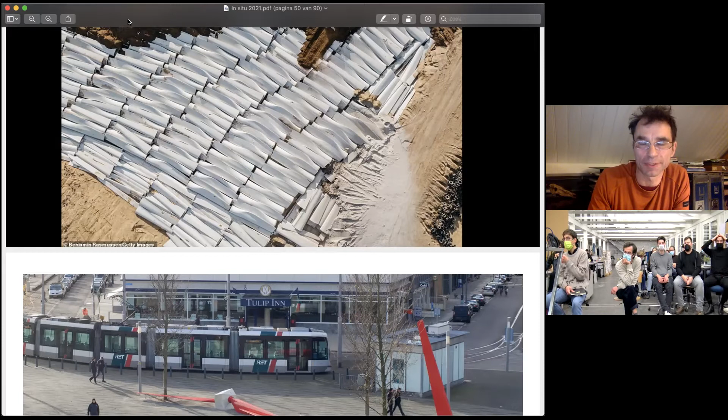Okay, I hope that I didn't make it worse. Yeah, it is what it is.

I think we will see what happens. Obviously I'm not sure that it's gonna collapse, but I think the signs are there. Nobody's sure, we'll see what happens. I think it's gonna be an interesting time, let's say that.